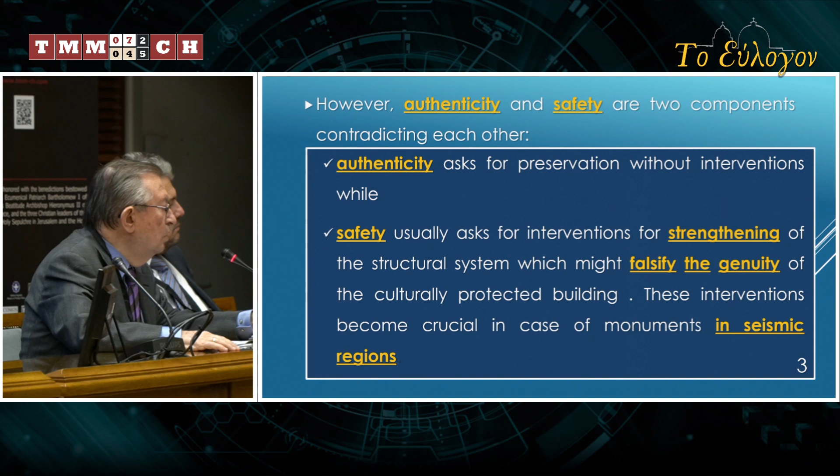The basic principles in restoration are the following two: first, authenticity must be considered the most important parameter, and second, life safety of the users must be considered equally important. However, authenticity and safety are two components contradicting each other. Authenticity asks for preservation without intervention at all, if possible, while safety usually asks for interventions for strengthening of the structural system, which might falsify the genuinity of the culturally protected building.

These interventions become crucial in the case of monuments in seismic regions. In this respect, the archaeologists, the architect restorer, and the structural engineer involved in the restoration of a culturally protected building are asked to find a common topos of coexistence so that the outcome of the restoration could satisfy both authenticity and safety.

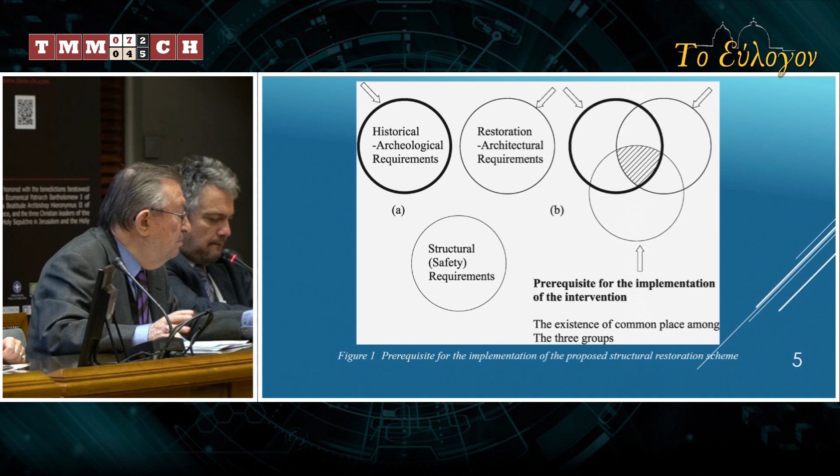In order to minimize the extent of the structural interventions, the following parameters must be taken into account seriously: the form of the structural system, its history and its modifications, the materials and construction techniques used in each phase of the building and their mechanical, chemical, and physical properties, the existing damages and deformations—cracks, spalling, drifts, settlements—and their time history, and finally the loads, particularly the seismic actions, as there is no guarantee regarding their ceiling value.

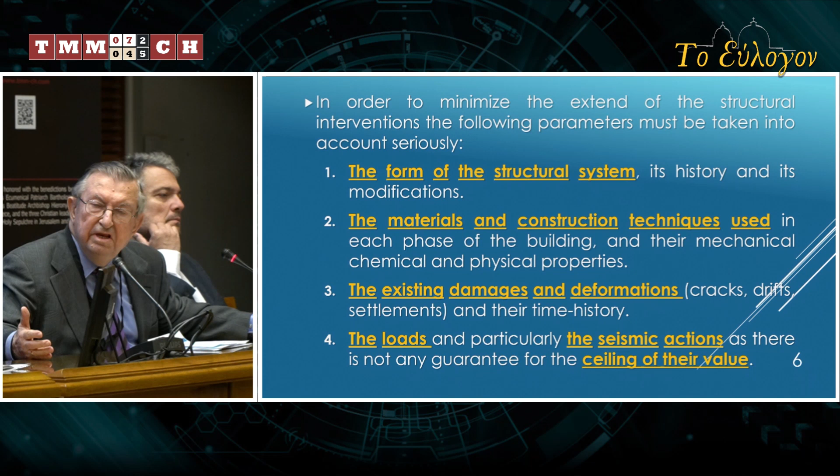I had a long discussion in Istanbul regarding the Hagia Irini, about which earthquake should be analyzed for the next phase of its life. It has survived 1200 years—and for how many more years, and with which earthquake level should it be analyzed? There is no ceiling.

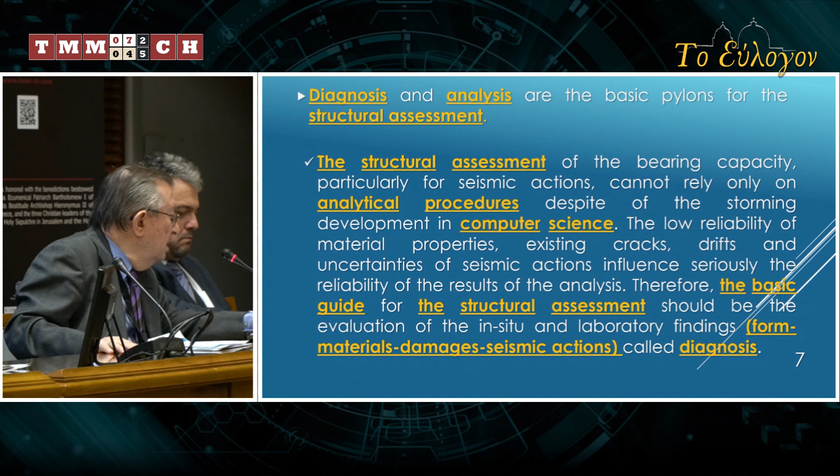Diagnosis and analysis are the basic pillars for structural assessment. The structural assessment of the bearing capacity, particularly for seismic actions, cannot rely only on analytical procedures, despite the tremendous development of computer science in recent years. The low reliability of material properties, existing cracks and drifts, and uncertainties in seismic actions, to which I referred just before, seriously influence the reliability of the results of the analysis.

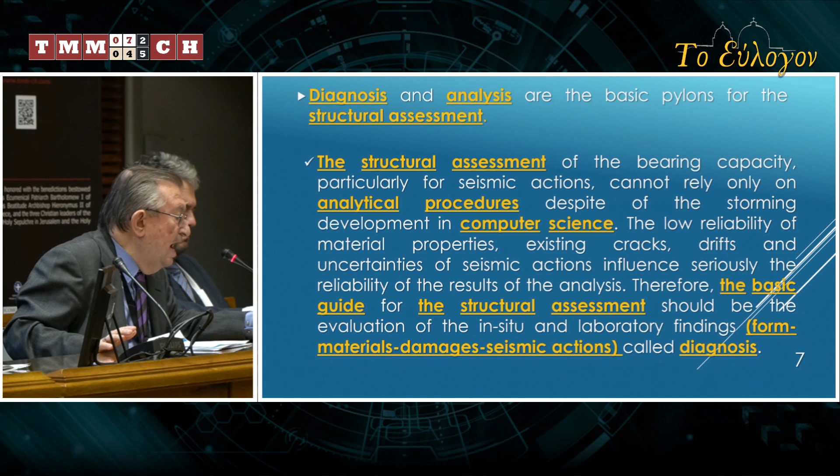The basic guide for the structural assessment should be the evaluation of the in situ and laboratory findings: form, materials. All these are called diagnosis. Diagnosis makes possible the qualitative connection of causes and effects, based mainly on facts such as cracks, material quality, inclinations, and so on. In this respect, it constitutes a deductive procedure of higher reliability than that of the analysis. The qualitative information of diagnosis must be the basic criterion for the level of reliability of the quantitative results of the analysis.

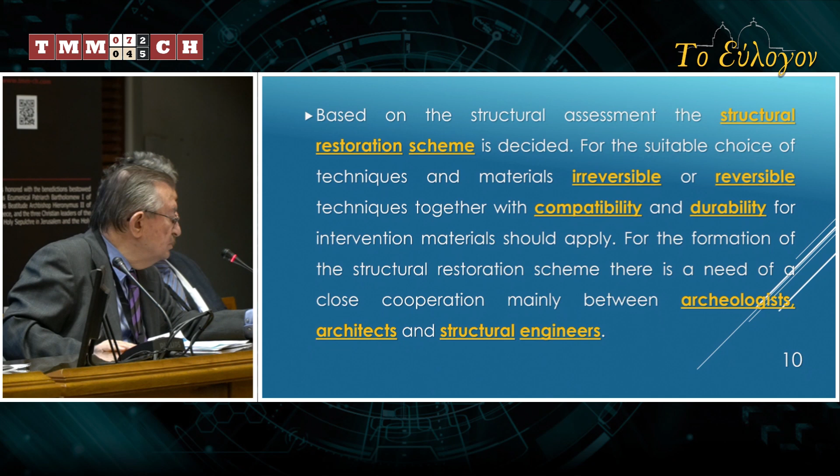Based on the structural assessment, the structural restoration scheme is decided. For the suitable choice of techniques and materials, irreversible or reversible techniques, together with compatibility and durability for intervention materials, should apply. For the formation of the structural restoration scheme, there is a need for close cooperation, mainly between archaeologists, architects, and structural engineers, as I mentioned from the beginning.

Closing, I would like to say that having vast experience in research and structural restoration of prominent monuments, but also in modern buildings in the last 50 years, I am sure that the collaboration between the above professionals may be more effective and fruitful if each has some understanding of the other's aims, needs, and approaches. Below, I will show you two or three pictures of monumental buildings I was involved in, and also a modern one nearby.

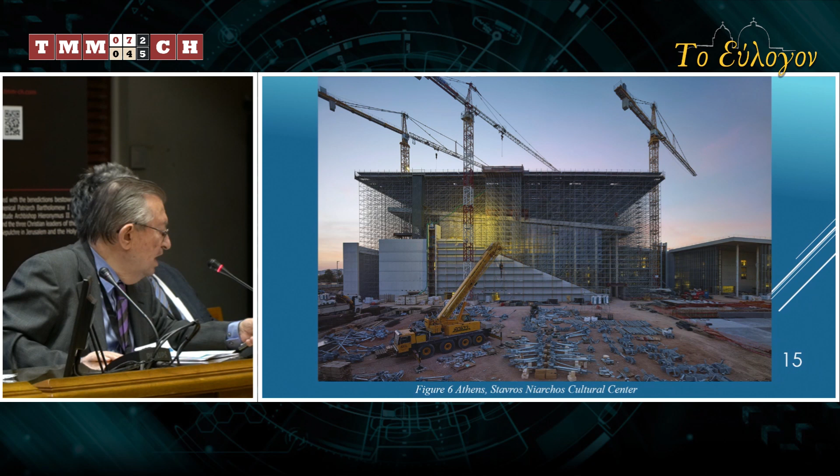Professor Penelis, thank you very much. Maybe one comment - I very much agree that interventions should be limited as much as possible. But we also have to give the message that proper maintenance during the lifetime of a monument should be performed. Yes, thank you.

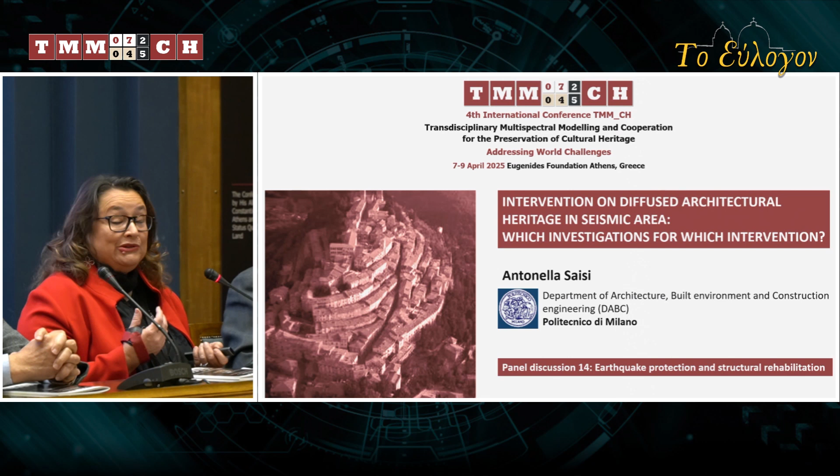I would like to thank Professor Moropoulou for the invitation to join this panel. That is very important for me because we are all dealing with the same problem in a very seismic place. And when we discuss heritage, we often think about monuments, but for monuments the process is more robust. We also have to think about the diffuse heritage that is an important component of our memory, our heritage, but they are often not protected in a strong way.

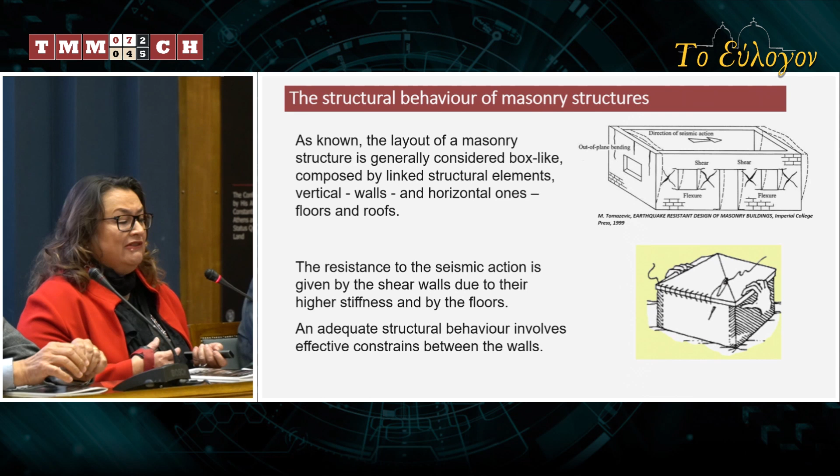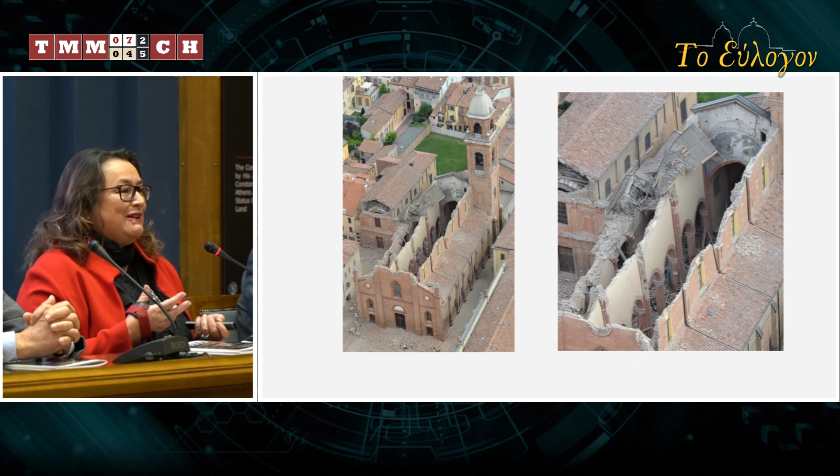And when they are mostly masonry, we always think of the structural behavior as a box, and then we assume the models which interpret the seismic behavior of this element would be simple, with stiff elements loaded mainly in their plane. However, when we instead see the pictures and damages of past earthquakes, we observe unexpected behaviors that are not coming from the box-like behavior. So the question is, what is not working? It seems there are gaps between the effective, real behavior and the structural models we apply for interpretation.

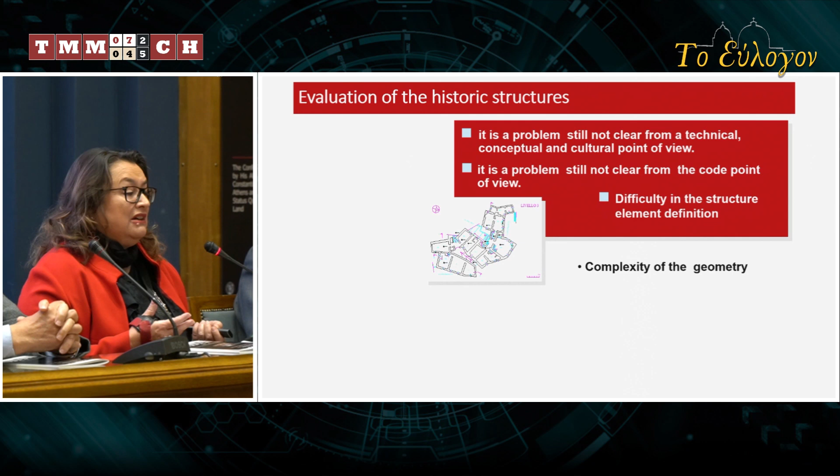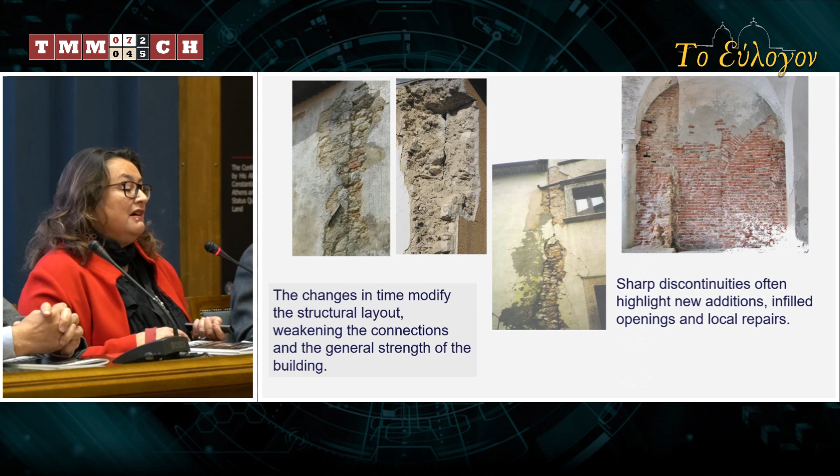So the assumption seems very far from the several common situations with irregular floor levels, lines of buildings, irregular openings, irregular interventions, and a lot of masonry discontinuities that are always affecting our historical centers. We assume the problem is still not very clear from a technical and conceptual point of view, including cultural point of view, and it's a problem still not clear from the code point of view. Sometimes it's difficult to identify or define which are the structural elements because of the complexity of the geometry, the unknown connections between each heritage building, the masonry properties in each case, and the characteristics of the structural elements, and again the change of the structure over time, because of intervention over time making a very complex structural element with weakening caused by lack of connection, with sharp discontinuities connected to historical phases, with infill openings and so on.

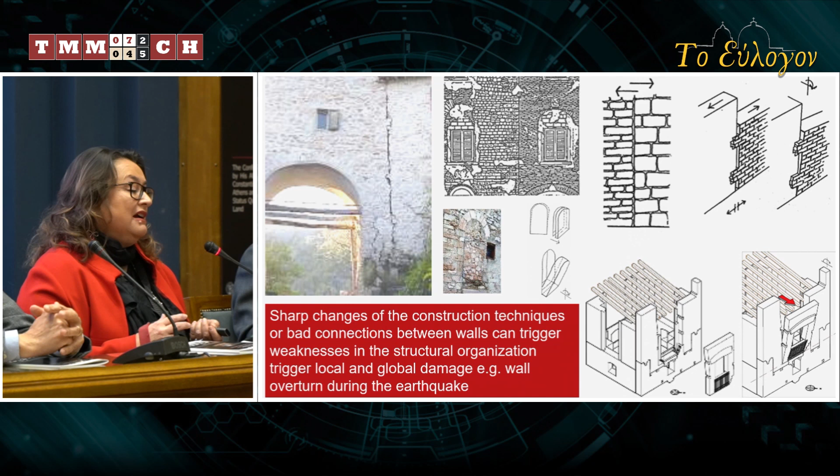All damages and lack of connection can of course weaken the structural organization, and during the earthquake this can trigger overturning. But again, we have to consider how, for example, common elements like chimney flues could affect the behavior.

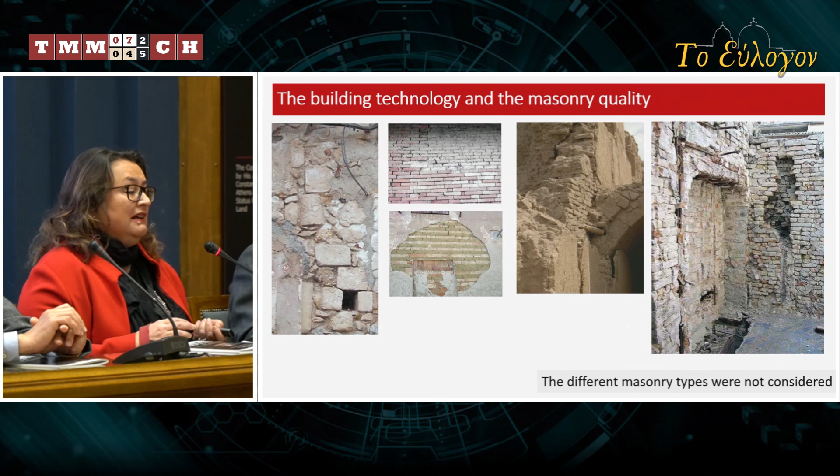And again, the masonry quality can vary and be more complicated than what we could understand. Another point is the several past interventions.

In fact, at least in the last earthquakes in Italy, we found that the damages were not considered by the structural models, but also the retrofitting techniques that were common until around 2000 led to creating a sort of hybrid behavior between masonry structure and the new additions, which were usually in reinforced concrete. But this means that the compatibility between these materials was not considered, and all the process, including the control of the intervention, was not considered in a proper way. I mean, up to a certain point, we believed that reinforced concrete could solve all the problems of masonry buildings.

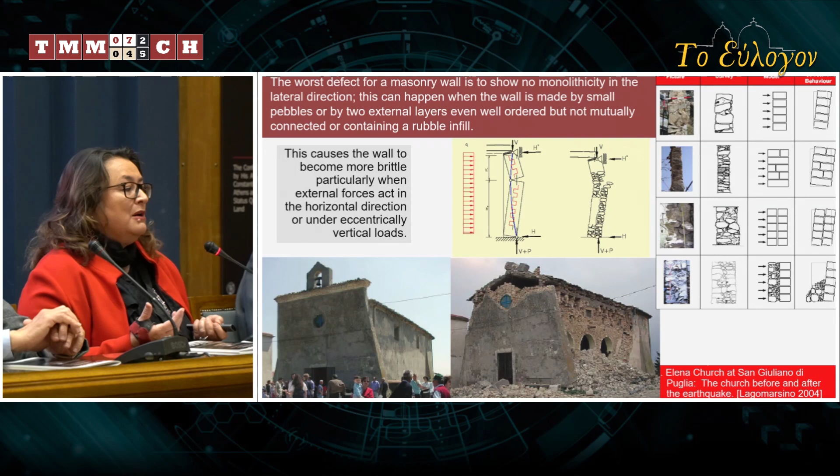So in some cases, the lack of compatibility with masonry or the poor application led to this brittle behavior, particularly due to lack of knowledge of the masonry characteristics, particularly stone masonry, which is the most brittle. But also some of these applications, like concrete roof and floor substitution, led to unexpected behavior at the time. But if you think about the detail of what could happen, we can understand that it is a lack of compatibility with massive intervention in masonry structures.

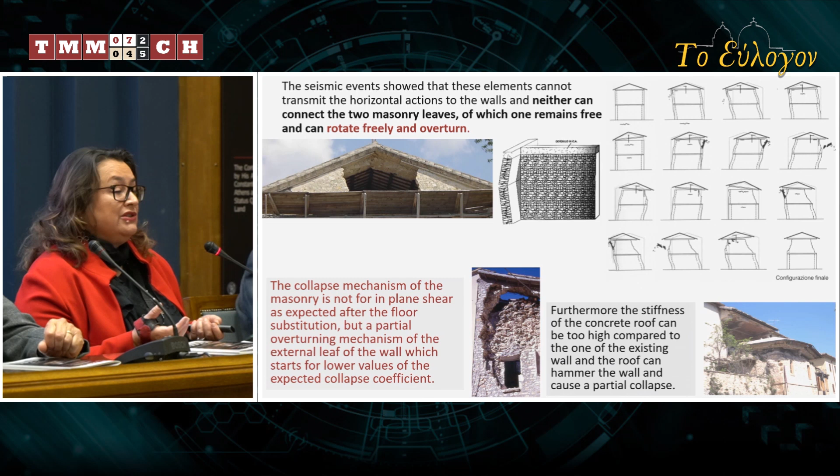And the intervention damages were very clear, particularly when we substitute a floor or a roof with reinforcing concrete structures. The damages here are very clear, but also some strengthening techniques applied to the masonry itself, like for example jacket walls, in some cases were not effective.

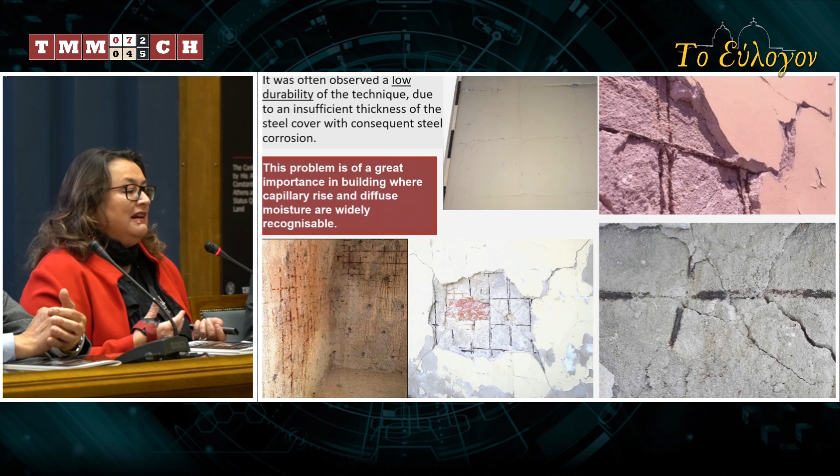This was due to the lack of connection, discontinuities between the application, but also simply the durability of these metal nets that, in presence of moisture - and the base of most historical heritage buildings is wet due to rising damp - led to the corrosion of the protecting elements.

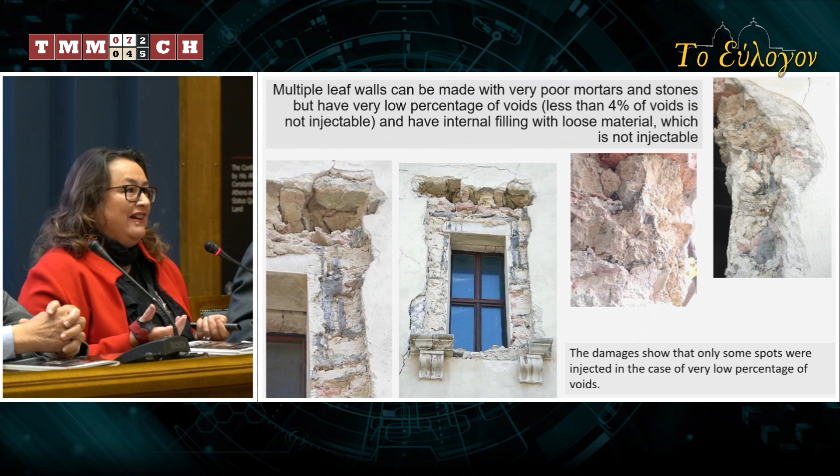So in any case, also the application of grouting - we believed that grouting was effective, but in most cases the masonry is not injectable at all because it has a poor quantity of voids. So the idea to reinforce this building, for example with the diffuse spots you can recognize in this picture, was not clearly enough for the effectiveness of the structure's behavior.

Then we have the review of the codes, and since 2003 we have some new requirements. So we have to take into account that the building should be known, starting from a simple step that was a geometrical survey, but also within this geometrical survey recognizing which elements were transformed. Then historical research is an important part of the structure assessment and of the past intervention. Again, material, decay and damage survey - the present state of the building with its material and its state of conservation, the mechanical characteristics of the materials that we have to evaluate for the intervention, including ground foundation.

And the knowledge must be continuing over time, considering monitoring within a process, as Professor Zani said, of continuing control and maintenance of the building. But even so, the code connects the knowledge of the building with safety through some codes.

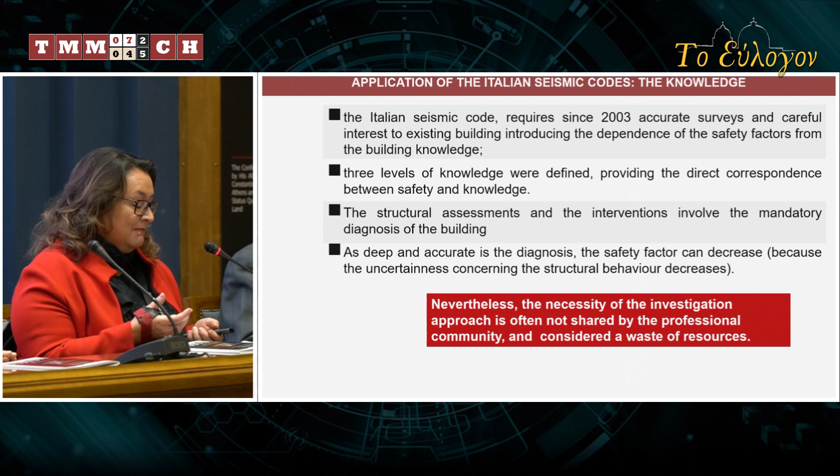And also, if the code says that you must know the building before intervening, and if you know the building very well, you will select a more effective intervention. So people prefer to have lower knowledge and to carry out a more massive intervention, because probably they have no trust in some ideas, even if they were widely diffused. So then we have to take into account another thing.

Yes, one important thing that Professor Paiani always said about AI: so, what is the database?

For the masonry, the database changed a lot if considering before the 2000, after the 2000, and the present, because now we have in many cases new techniques, FRP or other new materials coming from other fields, like in this case.

We are doing a lot of tests about structural behavior, but which is the real effective application? And again, which is the durability of these new materials? So we have not to do the same mistake as in the systematic application of reinforcing concrete.

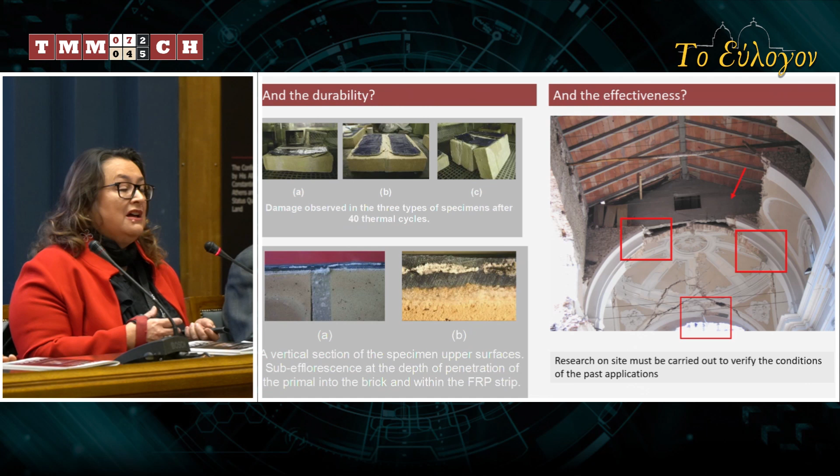We also have to collect information about whether they are effective. Is there any database of the behavior of such elements in new interventions, and how is the intervention after 20 years, 30 years, and for earthquakes? Also, the durability seems very low. We can conclude that diagnosis and knowledge is the base of seismic assessment and vulnerability mitigation.

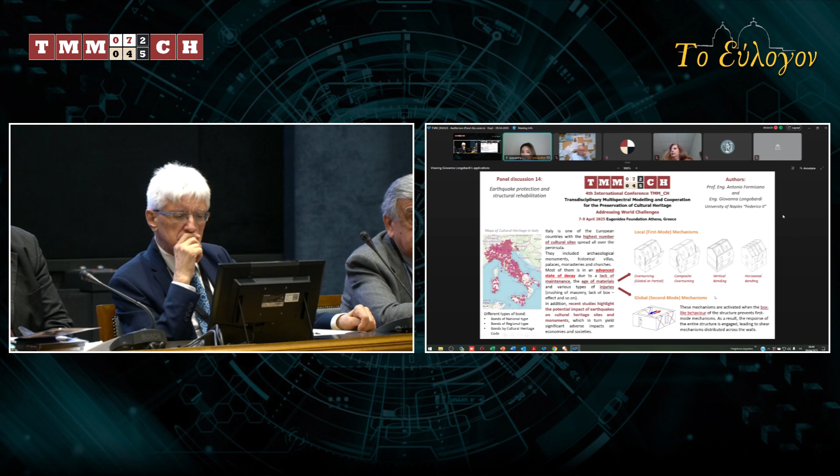For example, concerning local mechanisms, they involve single portions of a structure called macro elements, and they are associated with overturning and bending phenomena. If these first mode mechanisms are prevented, there is the global response of the entire structure with shear phenomena across the perimeter masonry walls.

But we can consider in some way, as part of cultural heritage, also clustered buildings, since they shape and characterize the landscape of historic city centers, not only in Italy, but generally all over Europe. What are clustered buildings? They consist of several structural units.

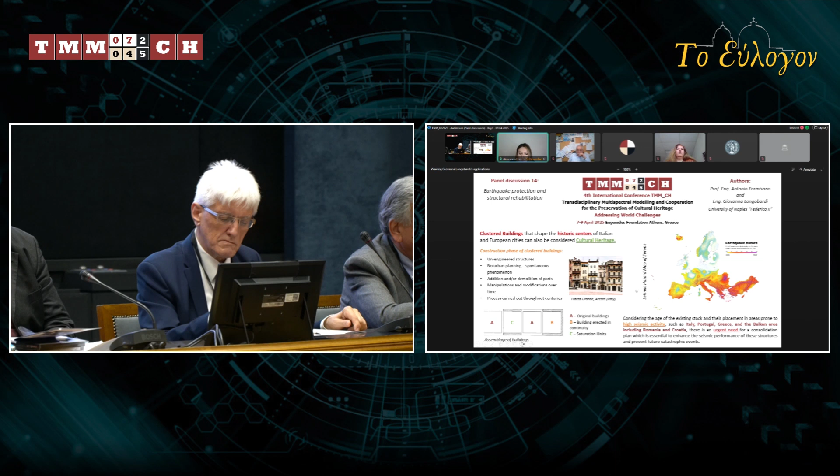However, cultural heritage clustered buildings in most cases are placed in areas having high seismic hazard, as evidenced in this picture. So there is an urgent need for a consolidation plan in order to improve their seismic behavior.

How to define a proper and adequate consolidation plan? Obviously, it is necessary to conduct an evaluation of the seismic vulnerability. For example, we can use the provisions given by Italian guidelines for cultural heritage, which propose three distinct evaluation levels of analysis, starting from the territorial scale up to the individual building scale, in order to investigate and understand the behavior of the structure and its single parts.

Based on the results, we can select some seismic retrofitting solutions, ranging from traditional methods, which include scuci e cuci and consolidating injections, to innovative solutions. Particularly, these innovative solutions try to combine the improvement of seismic performance with energy efficiency. For example, we can recognize plaster reinforced with natural fibers. So in some cases, these innovative solutions use sustainable, natural materials in order to reduce the environmental impact.

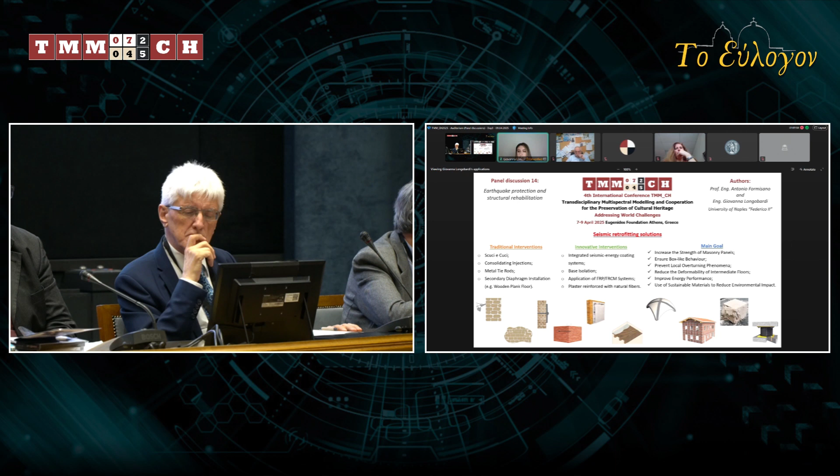So in conclusion, this topic is very important, but it is also very challenging because it's not easy to acquire structural and geometrical information about cultural heritage. But it is very essential to understand their behavior and to consolidate such constructions in order to avoid the loss of this huge patrimony, and obviously the loss of human life. Thank you.

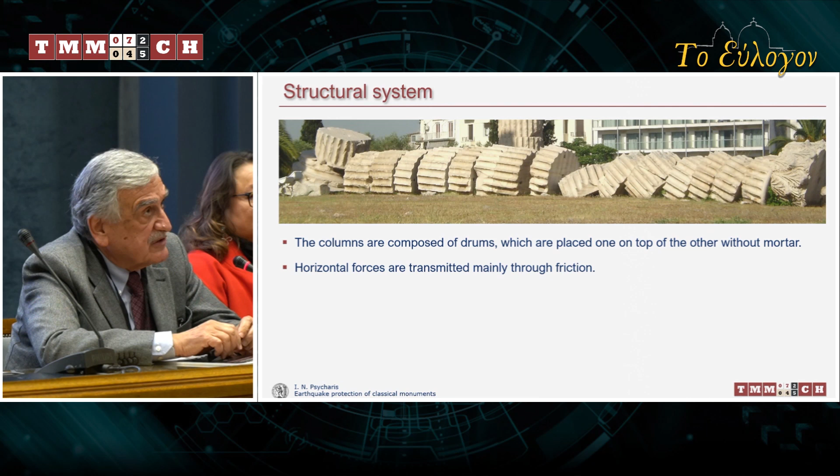I would like to talk about the earthquake response of classical monuments. As you all know, the columns of classical monuments are made of drums placed one on top of the other without mortar. During earthquakes, horizontal forces are transmitted mainly through friction, and the drums are allowed to rock and slide. This makes them kind of spinal constructions, so the seismic response is highly nonlinear, very sensitive even to very small changes of parameters, and very complicated. Special analysis methods and software are needed to calculate it.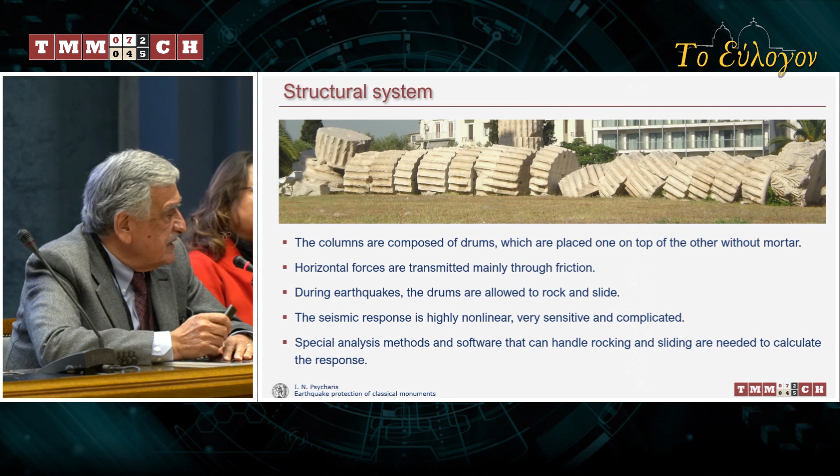So the question is, can such structures survive strong earthquakes? The answer is that despite their apparent instability, classical monuments are in general earthquake resistant in their intact condition, meaning when there is no damage.

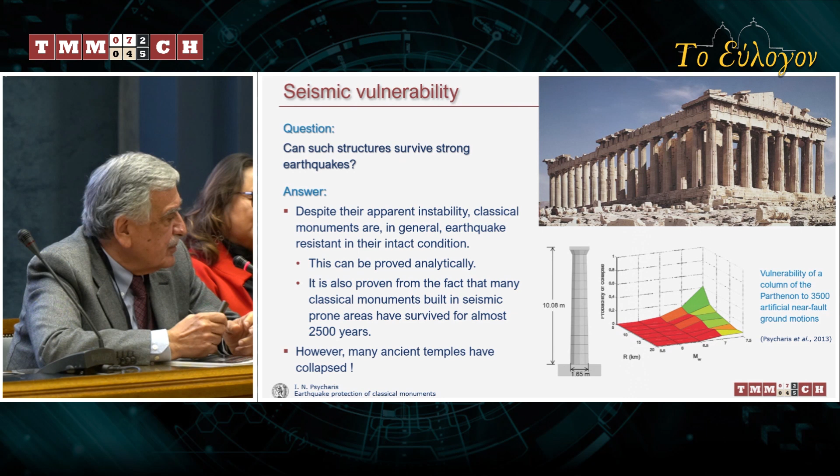The stability is also proven by the fact that many classical monuments built in seismic-prone areas have survived for almost 2,500 years. However, we must keep in mind that many ancient temples have collapsed.

So what are the factors that affect the risk of collapse of these monuments? First is the slenderness of the columns — the more slender the column, the more vulnerable it is to earthquakes. The second parameter is the absolute size of the structure: smaller structures are more vulnerable to earthquakes than larger structures with the same aspect ratio of dimensions. Similar structures, but larger, are more stable.

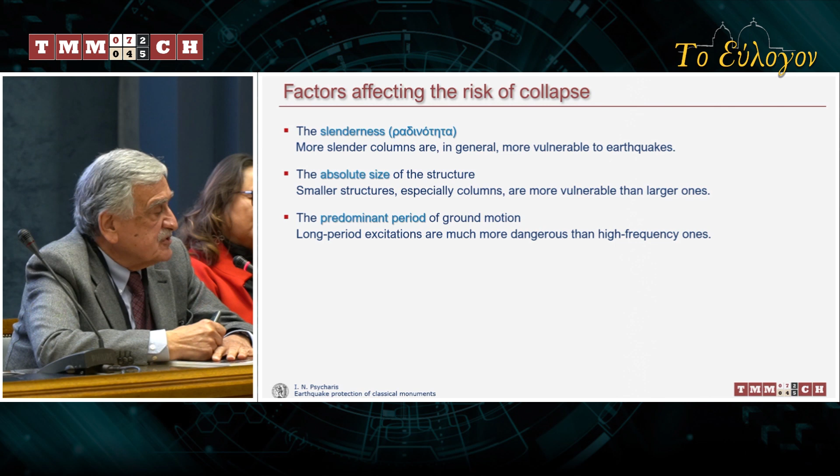The third factor is the predominant period of the ground motion, with long period excitations being much more dangerous than high frequency ones. The connections between structural members also play an important role in the structural response, and finally, damage is very, very important.

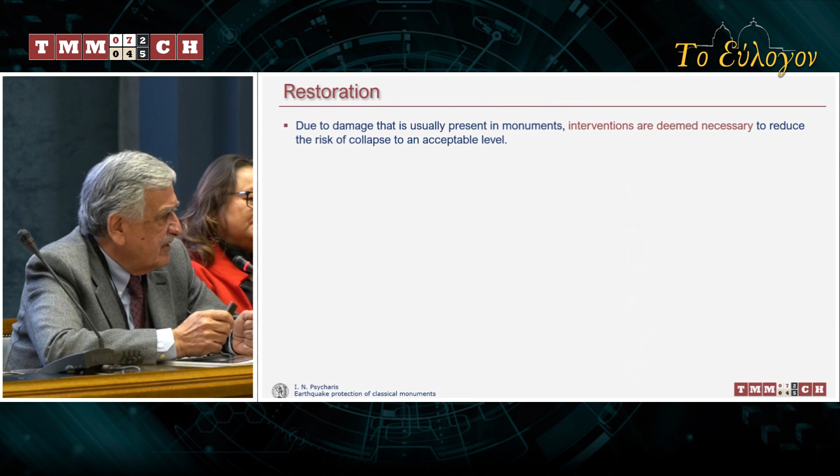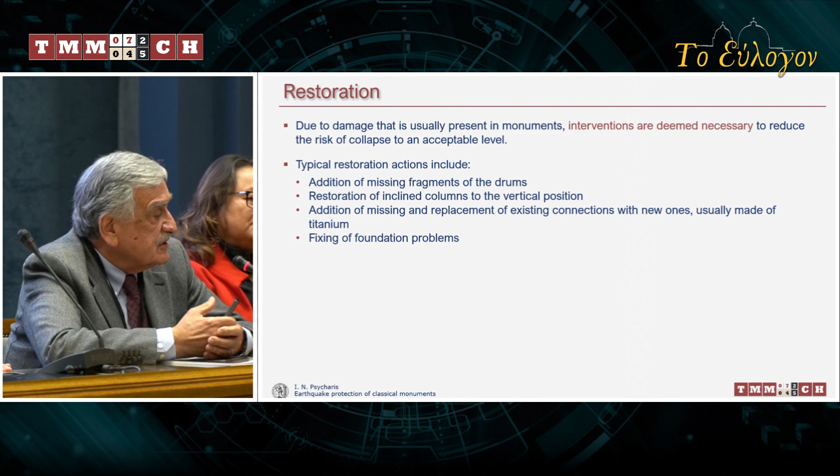Because today these structures have damage, interventions are deemed necessary to reduce the risk of collapse to an acceptable level. Typical restoration actions include addition of missing fragments of the drums, restoration of inclined columns to the vertical position, addition of missing and replacement of existing connections with new ones, usually made of titanium, and fixing foundation problems.

Such actions bring the structure close to its initial intact condition, but again, the structure surviving today is only part of the initial building. So even after interventions, there might be danger of collapse during a strong earthquake.

Unfortunately, enhancement of the stability of these structures is very difficult or even impossible because the aesthetics and the original architecture have to be preserved — this is what Professor Penelis mentioned before. For this reason, each monument is a special case that has to be looked at individually, and interventions to be applied have to be chosen carefully and after appropriate analysis.

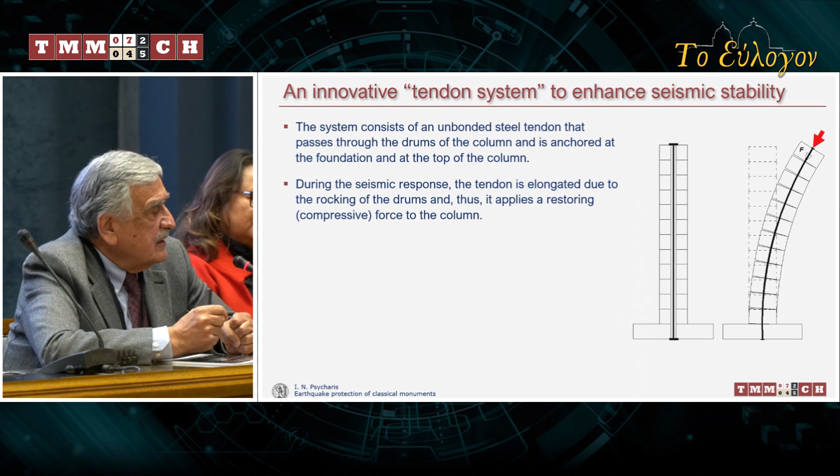One way to enhance seismic stability that we propose is this so-called tendon system. This is a tendon which we propose to be placed inside the columns, passing through them. They are unbonded tendons without any bond, and the tendon is anchored at the foundation and at the top of the column. During the seismic response, due to the rocking, there is an elongation of the tendon, and this produces a compressive restoring force which tends to bring the column back to its initial position.

The restoring force increases as the deformation increases, so we end up with a controlled rocking system. The advantages of this system are that the tendon is not visible, so we do not affect the aesthetics and the architecture, and the intervention is reversible in a way, except for the small hole that has to be drilled at the center of the column.

We proposed to apply this system at the restoration of the Pythios Apollo on the Acropolis of Rhodes. In that case, the columns will be restored with totally new material, so drilling the hole for the tendon is not a problem. The results show that the proposed system, with proper selection of the tendons, enhances the seismic stability, preventing collapse in the anticipated seismic motions that we examined.

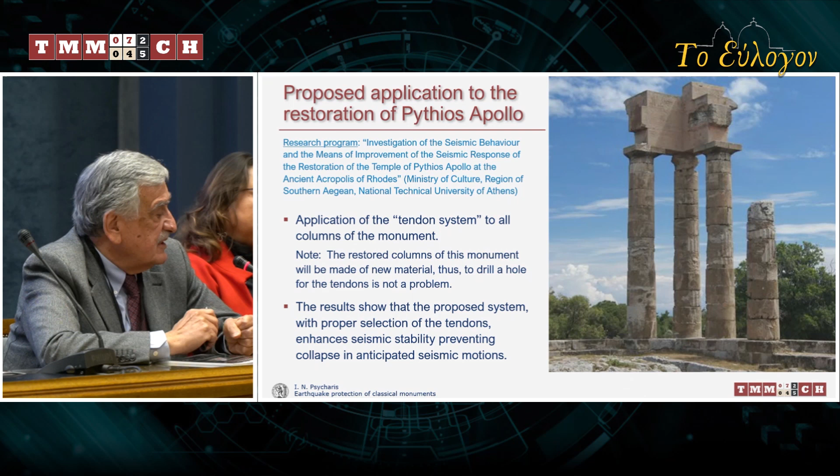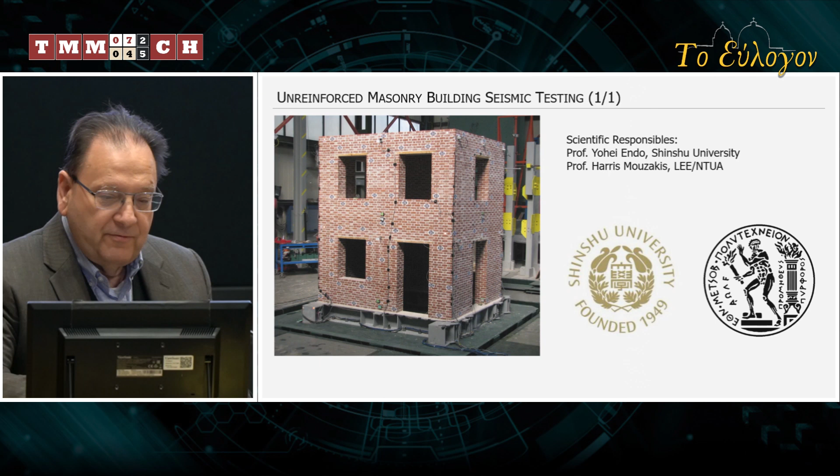The structure has 2 floors. We performed triaxial tests. It's a 1:2 scaled specimen, constructed with a double Flemish bond of 2 bricks thickness. The first story has a timbrel vault, and on the second story, timber joists and planks exist. That's how this masonry was constructed.

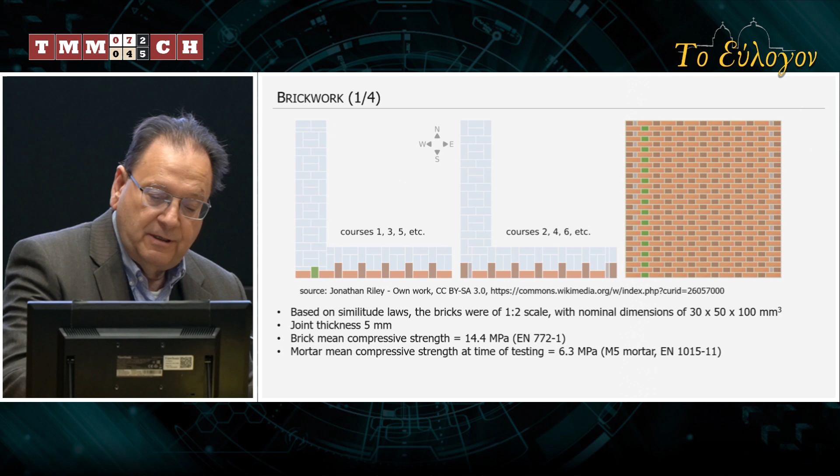We used bricks of 30 by 50 by 100 millimeters. The joint thickness is 5 millimeters. The compressive strength of the brick was 14 megapascal, and the mortar had a strength of 6.3 megapascal at the time we performed the shaking table tests. We started with some initial tests to find the compressive strength of the initial material, and then of the confined material. I'll explain later about this confinement.

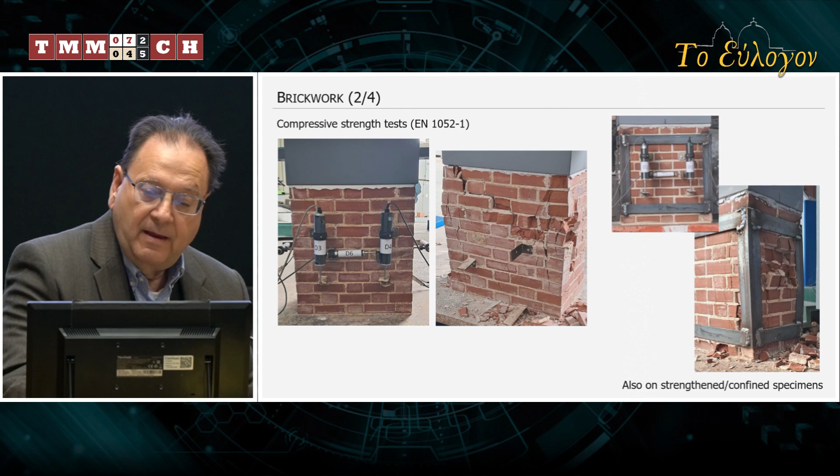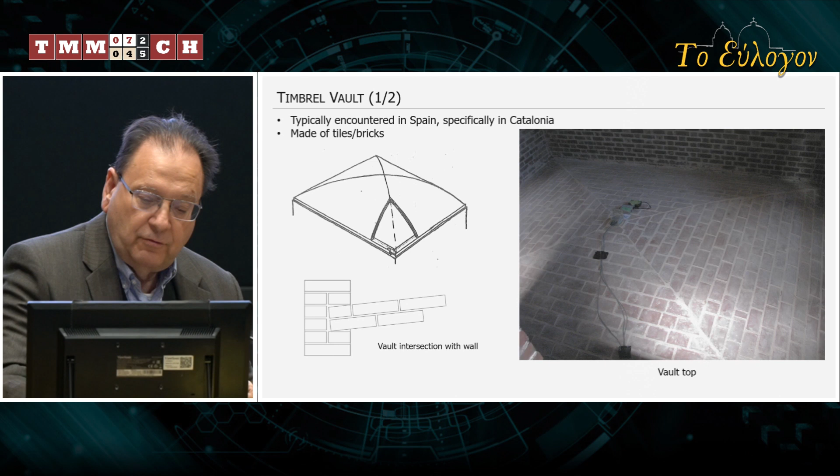The timbrel vault is a structure typically encountered in Spain, especially in Catalonia, and is made of tiles. You can see here how the vault intersects the walls of the structure, and that's a photo from the top and from the bottom.

Then we performed triaxial testing. We placed triaxial accelerometers, used wire displacement transducers, and a system with stereoscopic videometry using targets on the specimen, which has an accuracy of 0.1 millimeter.

Here is the test of the original structure. The peak acceleration is 48% of G. Many cracks appeared, but all these cracks can mainly be attributed to bending and not to the shear sliding of the bed joints.

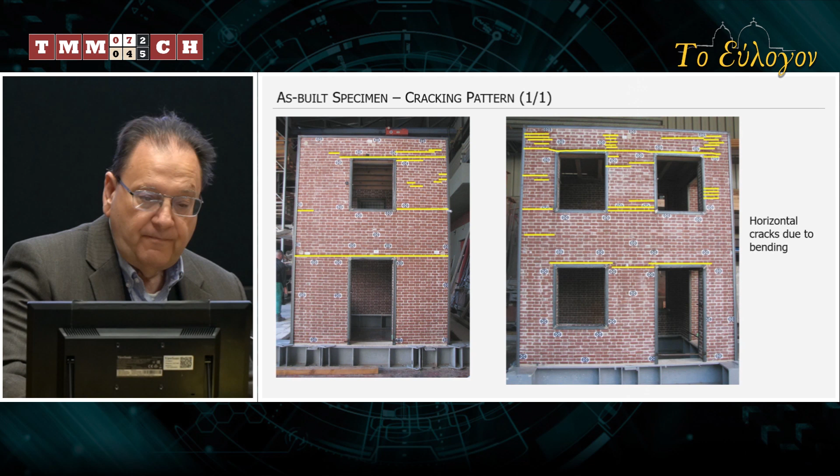Then we decided to strengthen this by using steel beams, and we did 3 different arrangements. In the first one, we strengthened all the piers for bending, and then we calculated the shear strength, taking into consideration the capacity design of the moments, and then we strengthened the structure for shear also.

For the second series of tests, we took out all the strengthening beams, horizontal and vertical, that were used to strengthen in-plane for shear, and at the end we took out also the 4 angle beams used at the 4 corners of the building. The maximum acceleration the structure suffered without any damage was now 1.5 G, about 3 times higher than the unreinforced structure.

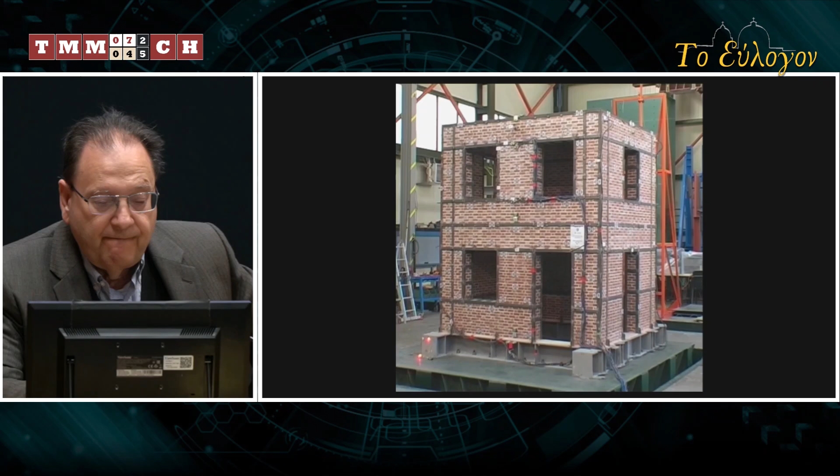Then we repeated the test. And that's the last one, where no corner beams exist on the specimen, none of the beams.

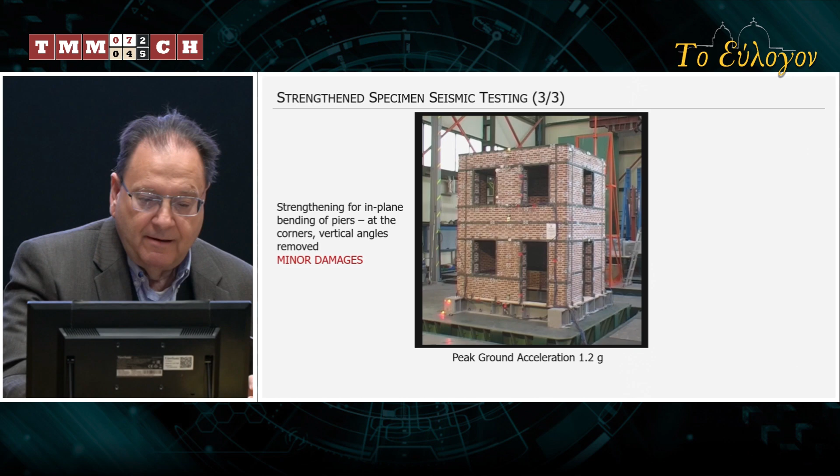Thank you very much for a very interesting and very instructive presentation. It reminds me of the classic strengthening with wooden planks. Yes, so it's obviously the old masters understood earthquakes as well.

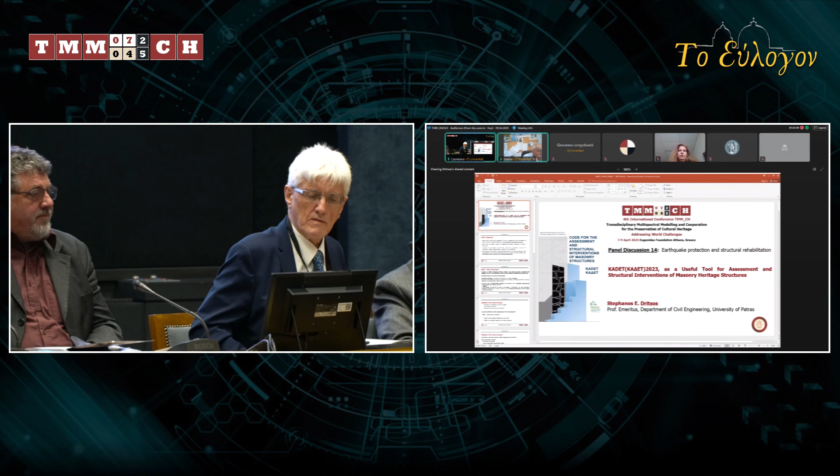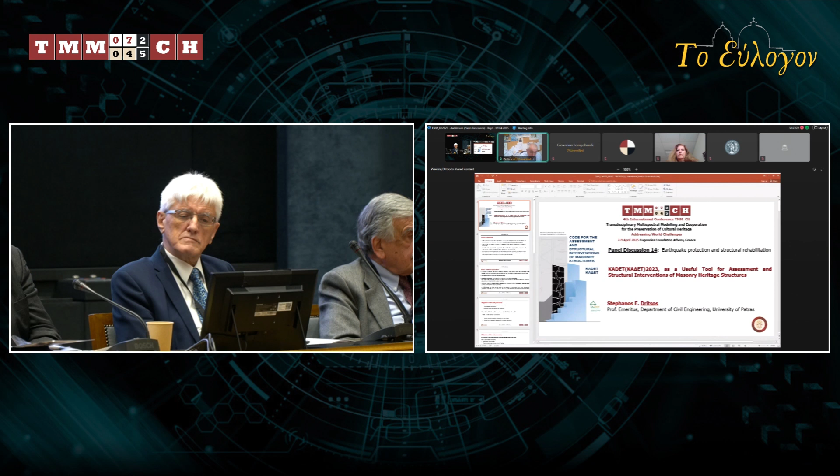I apologize for these problems. First of all, I would like to thank you very much, Rocco, for being here in Athens. We are glad to see you. And of course, I want to thank the organizers, specifically Tonya, for giving me the opportunity to participate in this panel and try to give a sense of KADET, which is the code for the assessment and structural interventions of masonry structures, which can be used as a very useful tool also for heritage structures.

The objectives of KADET: it sets the rules for the inspection, the surveys, the investigation, the documentation of the structure, and there are specific references to monumental and preserved structures. It also sets specific criteria for assessing the seismic response of masonry structures and gives the appropriate approach to select the appropriate measures for interventions. Also, there are criteria for the redesign and retrofitting of the structure.

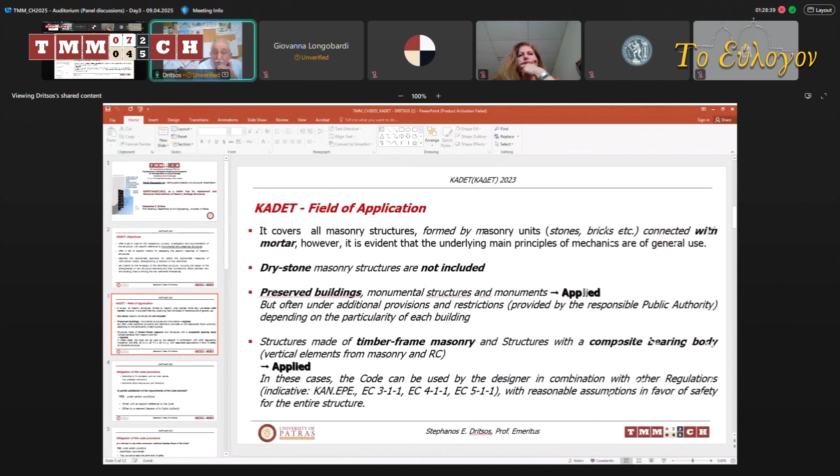The field of application covers all masonry structures formed by masonry units connected with mortar. However, it is evident that the underlying main principles of mechanics are for general use. Dry stone masonry structures are not included. Preserved buildings and monumental structures are included; it is a main part of the code, also including structures made from timber-frame masonry and from composite bearing body structures.

The obligation of the code provisions depends on the expressions used in the text. Somewhere you can find that it be must, apply, may, propose, and the comments in the code have the same force as the main text. Also, in the code, a partial satisfaction of the requirement is allowed under certain conditions, either with an explicit reference to the code for these exceptions, or by a relevant decision of the competent authority.

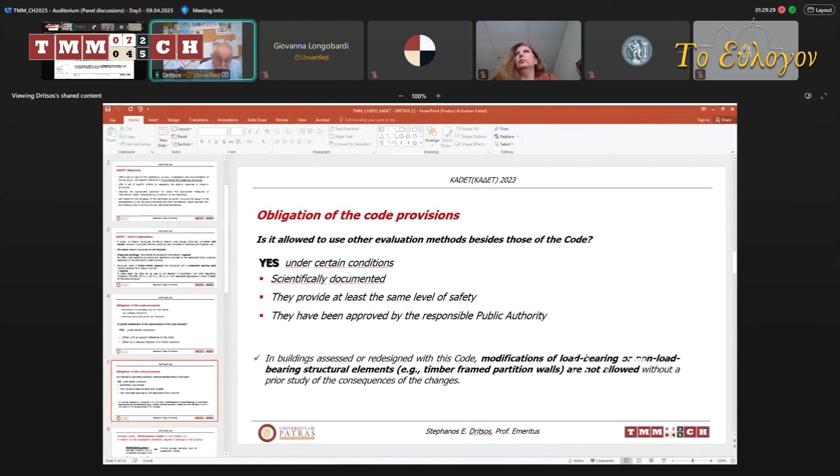It is also allowed to use other evaluation methods besides those of the code, under certain conditions. In the code, you can see that the main concept of the damage, the performance level, or damage level, or limit states that are included in all assessment codes, are also included here, covering different performance levels concerning minimum damage, significant damage, or excessive damage.

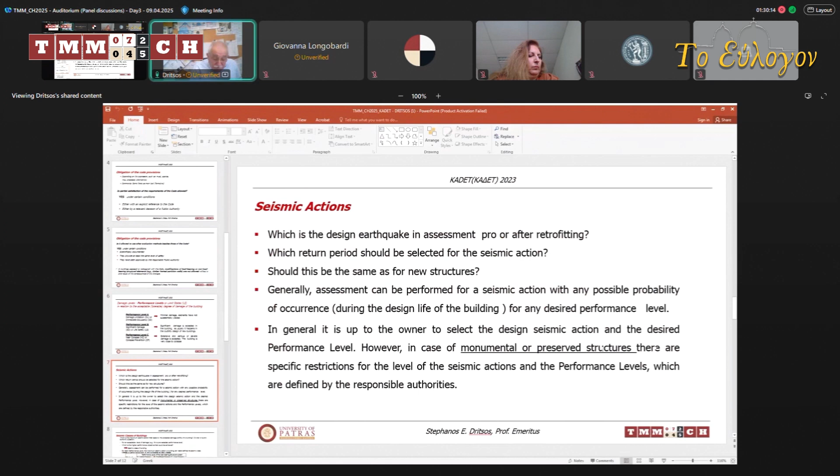Concerning the seismic actions, which is the design earthquake for assessment pre- or after a retrofitting work, which return period should be selected? Should it be the same as for a new structure? The answer is no. It is a decision of the owner or of the public authority.

And the question: which is the maximum seismic action that leads to the accepted damage profile of a building? This is the accepted damage profile that the owner or the public authority wants. To answer these questions, different seismic classes are provided, so any structure can be evaluated and assessed for a specific damage profile. Depending on the capacity of the structures, we can categorize them into different seismic classes, and this is very important for heritage buildings.

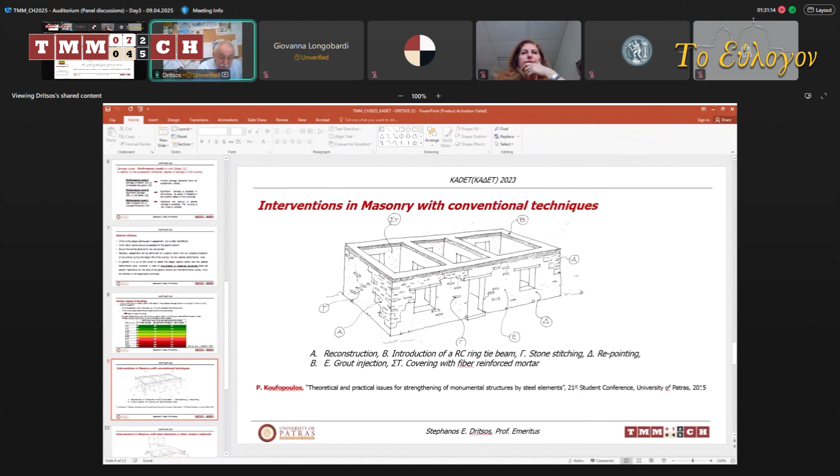For intervention in masonry, all the traditional and conventional techniques are included and described, how this should apply, and also with the design work. It also focuses on intervention with steel elements and other modern materials, including the technology and design procedure.

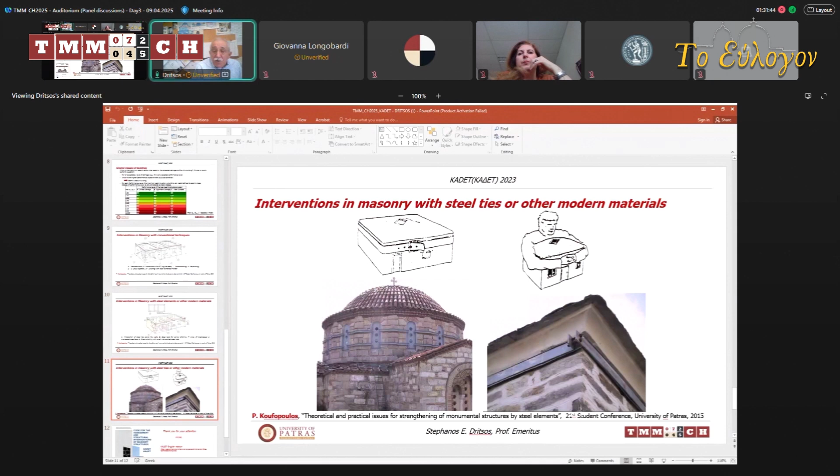Some photographs illustrate the main concept of the code: masonry with steel ties and other modern materials in order to provide the box behavior of the building. That's all, thank you for your attention. Here is the site with the English version of KADET, which was just published a few months ago. Thank you for your attention.

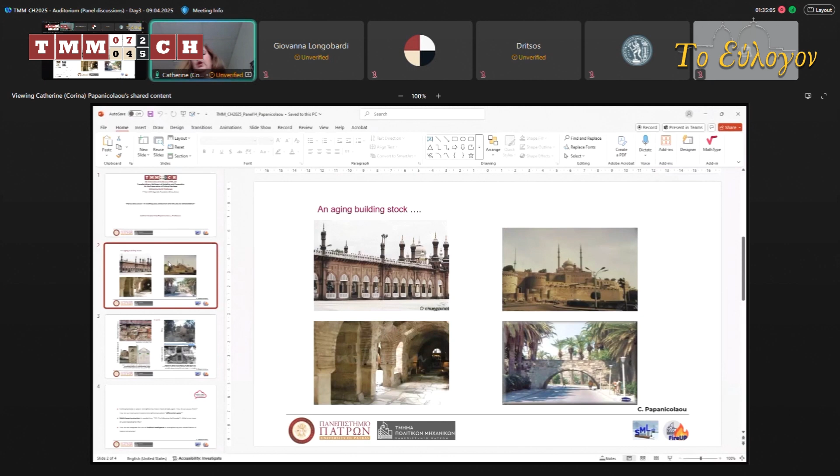So I made the decision just to simply provoke the discussion on a very limited list of issues which I think are on the rise right now. It is an undisputable fact that our building stock is aging and that it is in peril.

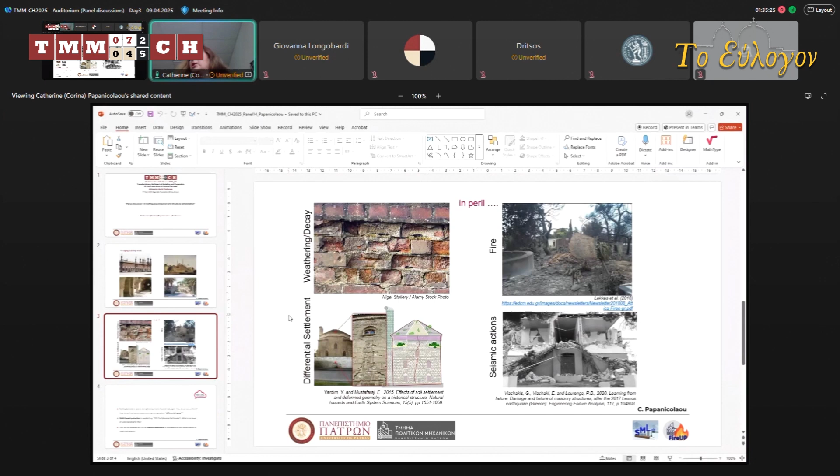What I want to highlight and provide as food for thought is that what needs to be contemplated is the combined action between seismic actions and other causes of risk, such as weathering, differential settlement, and fire. So multi-hazard protection is needed. As an example, I provide the example of fire following earthquake.

What is our level of understanding regarding this? Not much is done. FFE, as it is called, is at its infancy right now, and there is actually a virgin field of research that lies ahead. Also, earthquake following fire is another issue that has to be taken into consideration.

Another issue is the fact that the existing, and dear Antonella's presentation already included that, you might mention, dear Antonella, saluti, long time no see, the existing already in place strengthening means have already aged, and Antonella showed a photograph of it.

How do we assess them? How do we treat parent system versus strengthening system, differential aging? So it all rolls back to the long-lasting issue of compatibility. Now compatibility has also a time aspect along with it.

And last but not least, and there was also a mention from Antonella regarding Professor Papaioanou's presentation in another panel, how do we integrate the use of artificial intelligence in strengthening and rehabilitation of historic structures? In this context, we have to bear in mind that what AI does is, by machine learning, knowledge discovery from data (KDD), and data mining (DM), AI is trying to find patterns and fill in the blanks for data that is missing.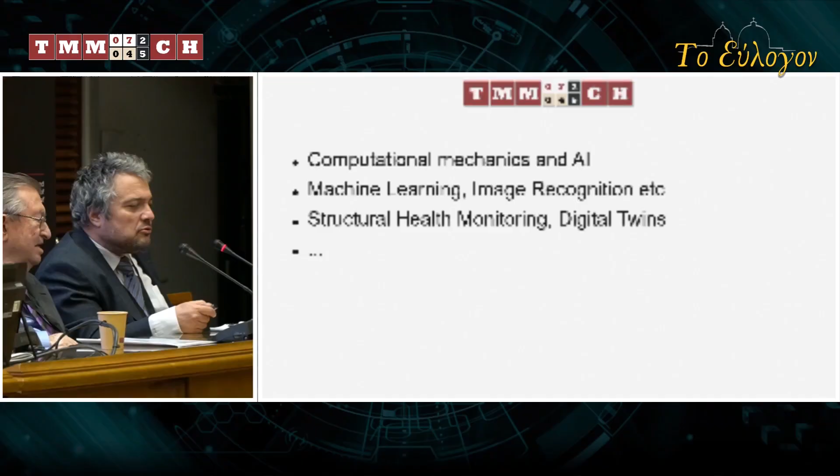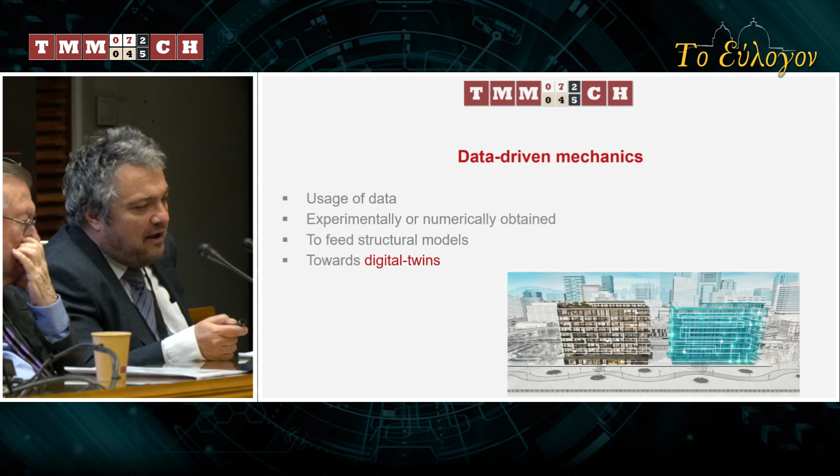Well, we are talking about modern tools, computational mechanics, artificial intelligence, machine learning, image recognition, etc. And I would like to add here structural health monitoring and digital twins, for good reason. What we are doing at this time, and you are invited to attend the technical presentations, is to use data within structural analysis - to integrate experimentally or numerically calculated data within the structure.

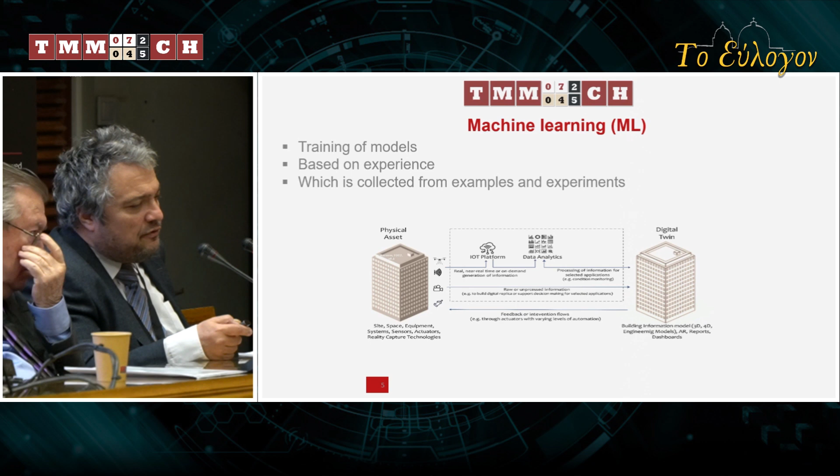This data can be updated during the life of the structure if they are available. This is an example: if we know the composition of a building, the composition of the wall, we can do numerical homogenization in order to put all ingredients into the mechanical behavior. At another level, we can take measurements of the whole structure and update the model during its life, taking into account in a holistic way all changes during the life of a structure, including damages due to an earthquake.

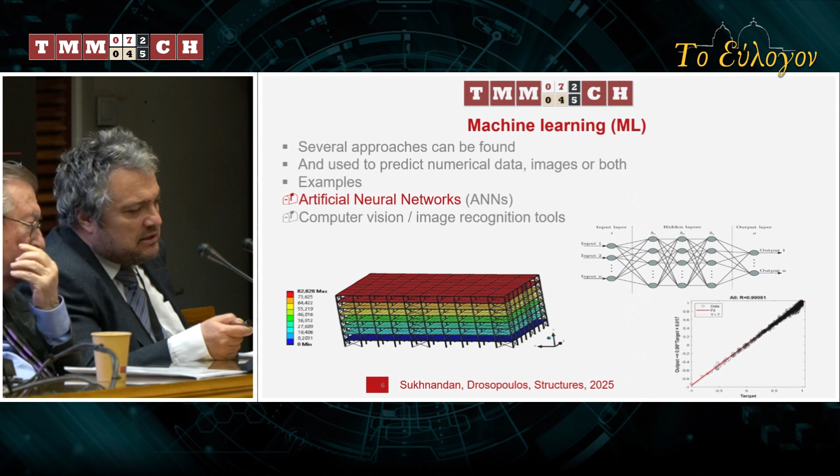We have done computer experiments comparing results with predictions of artificial intelligence, and we have shown that this path works. This is an example of integrating the microstructure by means of artificial intelligence tools, making it possible to use what was impossible several years before: multi-scale analysis within classical everyday structural analysis tasks, because the classical FEM squared approach, as we all know, is a very expensive tool.

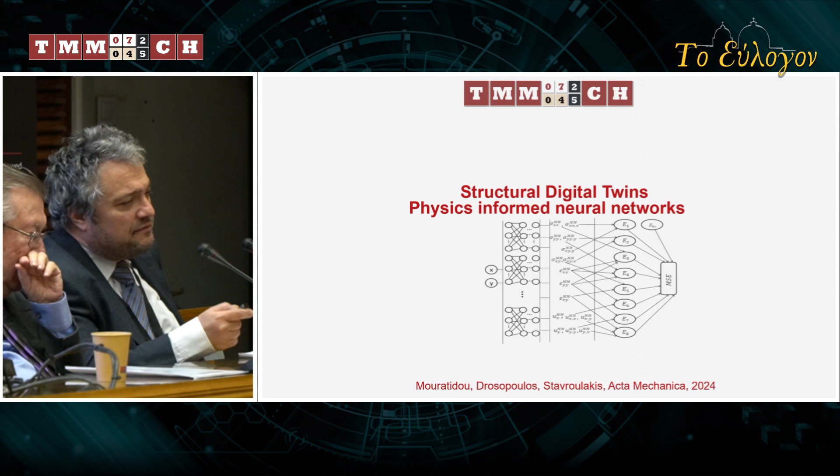Well, the last thing is that we can introduce into artificial intelligence tools the classical mechanics, the classical rules of mechanics. The modern trend is to create so-called physics-informed neural networks. Instead of comparing measurements with the prediction of a network, you use the network itself, you differentiate it, and then you try to fulfill the partial differential equations of elasticity, what we have done in classical mechanics in the first years of our study.

Well, other kinds of tools, which will be presented in parallel sessions, are optical recognition of the shape of cracks and damages, whatever is required to fill first the OASP questionnaire and the FEMA questionnaire, the first step of evaluation after an earthquake of damages, and then to create a quick model in order to predict the results. Here is an example: if we have a picture of a masonry structure, we can evaluate from this picture directly the response or the collapse. Behind this is a database created by classical modeling, and on top of it an evaluation tool based on deep learning.

Well, the reality, of course, is that we have in front of us old structures. We need a lot of information. We have to capture this information, as other people have already mentioned. And we now have in Greece this KAN.EPE, which Professor Grisos mentioned in his talk, which gives a categorization of structures, performance levels, and seismic classes.

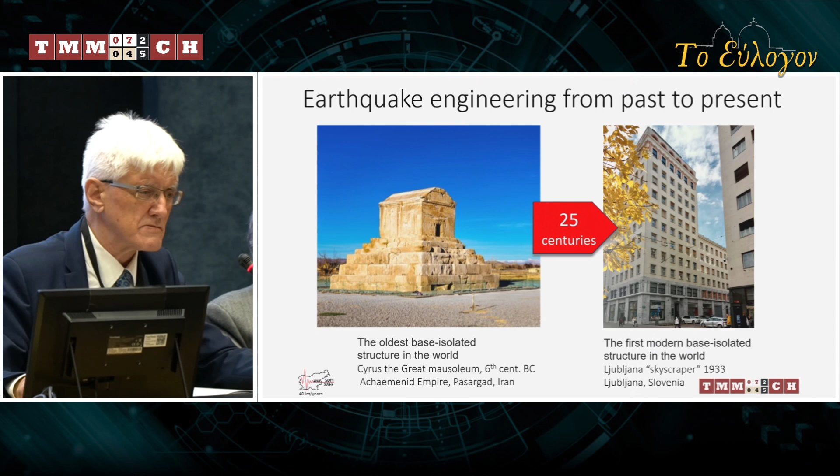Well, Eurocodes, we are all familiar with them, many of us are working on them. This is a story of 45 years already since the start. But we have two cases of Eurocode for repair and strengthening - the first version was 8.14, which was replaced by Eurocode 8-3. The problem is that cultural heritage is even less addressed in the latest one than in the first one, which in my opinion, my engineering opinion, was practically more usable - but this is not a criticism, it's just my understanding.

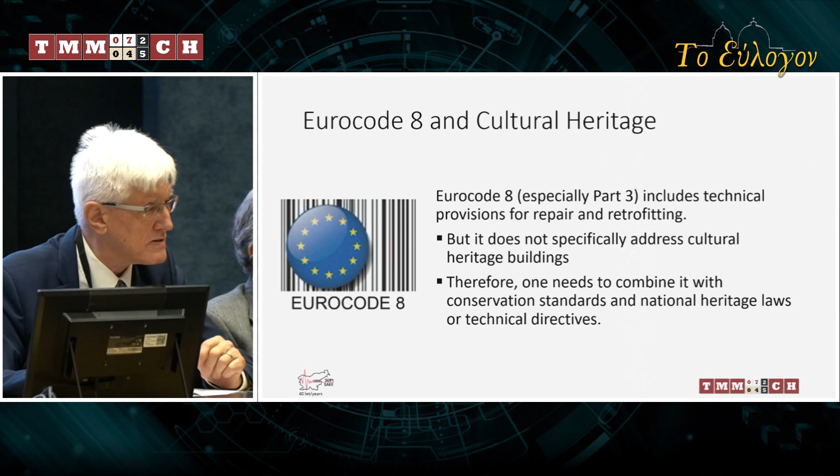When we try to intervene in heritage, we have to somehow combine conservation standards, national heritage laws, and everything. Yesterday in panel 9 we had a very good statement in the last slide regarding this - I didn't know that before. And also Stefanos showed us today some possible solutions being developed here in Greece, which is a very good point. So we are using different tools - I'm using, let's say, Tremuri software, and part of Eurocode can be fulfilled by assessment. But what is missing is not addressed.

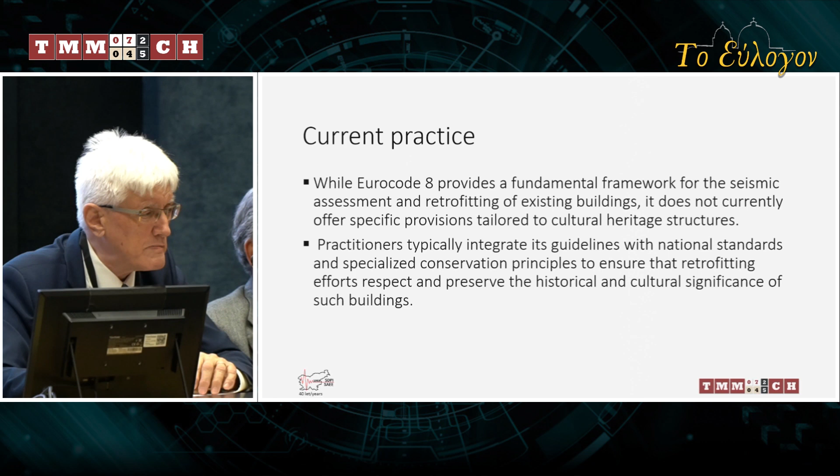Preserving historical materials and architectural authenticity, working with conservation constraints, adapting intervention techniques to fragile and non-engineered materials - these are all open questions. And why? There is a problem: I'm a civil engineer, and I work with architects very well, I can also work with conservators. But sometimes conservators do not understand our problems because they're more concentrated on their own issues. So when it comes to decision making and signing the project, it's always a debate how far civil engineers and architects can intervene, what is in conflict with conservator rules.

So some kind of regulations, especially in laws that come in countries after an earthquake, these problems should be somehow addressed to help conservators, architects, and civil engineers cooperate better. We should discuss in the future how far the future development of Eurocodes can address the specific issues of interventions in cultural heritage. Do we need more precise national post-earthquake retrofitting regulations regarding cultural heritage? Should precise requirements cover retrofitting measures, including appropriate material use and types of materials, including emerging ones, what we heard today? And can it contribute to better understanding and cooperation among investors, conservators, architects, and structural engineers?

And now the last slide, to support Professor Moropoulou, because Athens is waiting for her declaration. We started to think about heritage resilience since our project EU-CHIC, European Cultural Heritage Identity Card, in the same framework - that's now 15 years ago. From that, we were also thinking about resilience. And this is some exercise here, which I did with my colleagues, on how to understand the resilience of heritage.

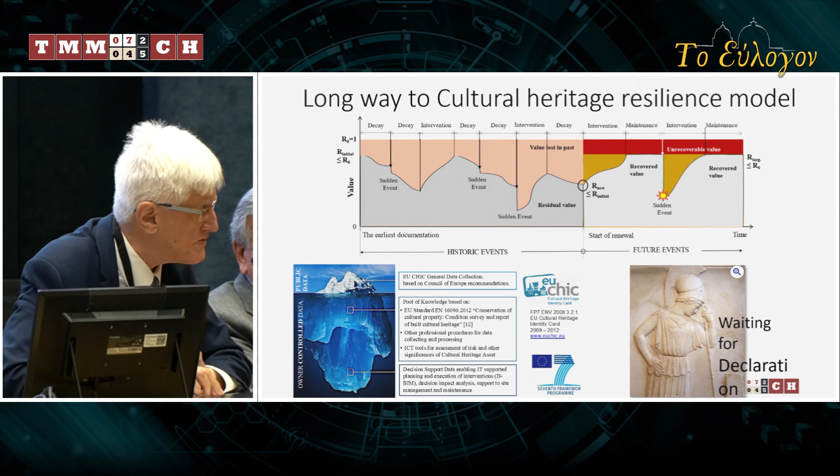First, what we have to have is complete data as far as possible, because the value of a monument at the moment it came into life, we cannot recover. We can try to understand, to get as much data as possible. But we have to know that at the end, when we are retrofitting - what I'm doing - we cannot bring back the whole value, but we have to work to do as much as possible. And that's why we need some declaration. Athens is waiting, and I hope this activity of Professor Moropoulou will be successful. Thank you.